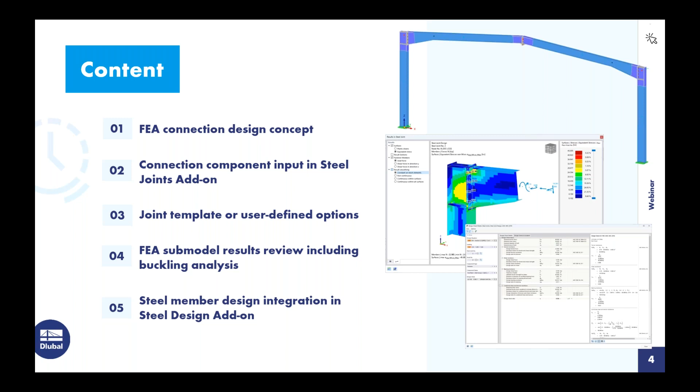So we might be wondering, why would we utilize FEA for steel connection design? Obviously the biggest benefit is going to be the design of non-standard or unique connections. Most likely you have a solution for very basic or standard connections. A lot of software offers this, or even hand calculations. But when we look at this connection over here on the right-hand side with a lot of different components going on, it becomes a little bit more difficult.

So this new steel joints add-on within RFEM allows us to consider the components and the members both in plane and out of plane in one single FEA model. We also can consider complex loading. So if we are modeling the entire steel structure within RFEM, we can apply any of the member loads or unique loading scenarios to the structure itself. The member internal forces at the member ends at the joint will simply be used for the connection design.

So no need to integrate those member end forces into an external program. Again, everything is done within this single file. The submodel is automatically generated underneath the hood of RFEM. So this really doesn't require an expertise level knowing how to create these FEA models. They are rather complex, but rather if you just have a general FEA knowledge, you can go ahead and utilize this capability within the program.

We also will perform the AISC design checks of these connections for our bolts, our welds, and our plates, but we will take it a step further to create a second submodel to carry out the buckling analysis. So we'll be able to view the different eigenmodes and failure buckling modes of this connection, as well as the critical load factors. We'll see that a little bit further in the example today.

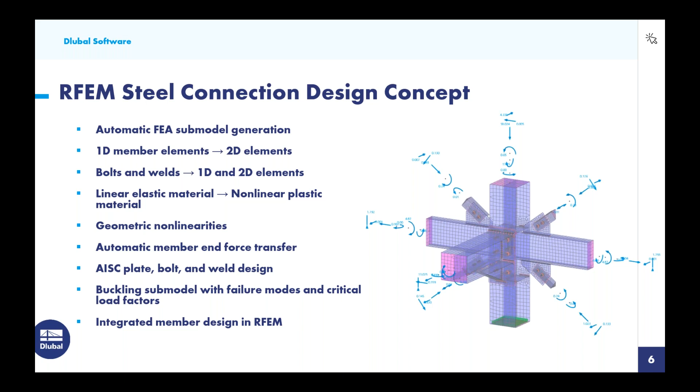Of course, we can get the connection design, but also the ability to design the members themselves, and not just steel, but any material we offer. You could combine this connection design with concrete, aluminum, cold form steel, even fabric tensile structures—all the steel connection design within that same file.

We will begin then in RFEM with our initial example. When we create a new model, we give it a model name. The type of model here is going to be in a 3D environment, so although we just have a simplified 2D frame here, we still are accounting for all forces in and out of plane.

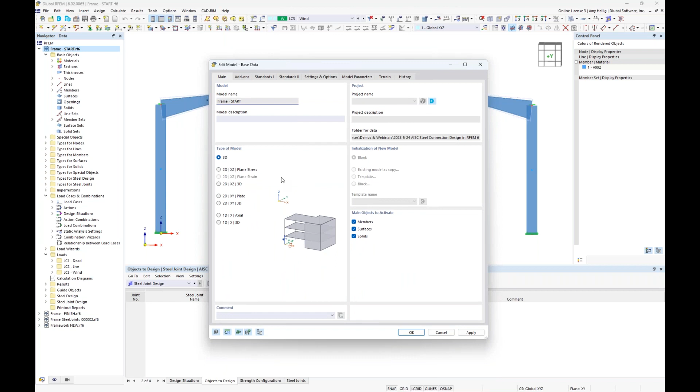Under the second tab, for those not familiar with our program, RFEM is the base program. This is where we can fully model, load a structure, and get the full static analysis. But if we want to do a more advanced analysis like dynamics, or design according to various standards, we need to activate these optional add-ons, which you would purchase specific for your project design.

For today, we'll be activating the steel design, which carries out the steel member design according to AISC, and of course the steel joints for our connection design. Under the third tab, we will generate the load combinations automatically according to ASCE 7.

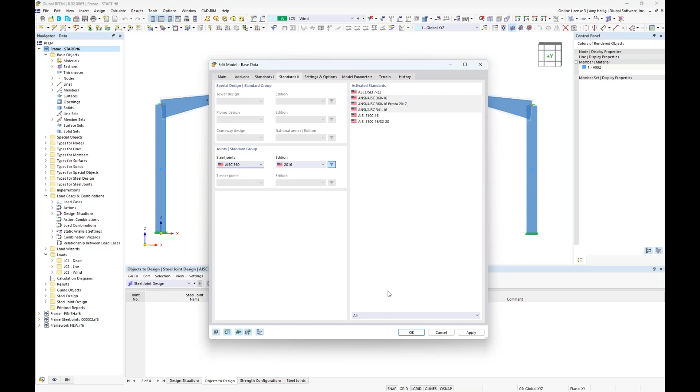We have added the 2022 standard, so that's available here. The steel member design will be carried out according to AISC 360-2016. Under our fourth tab, Standards 2, the steel connection design will also be carried out according to AISC 360.

Once all of this information is input into our base data—as you can see here, for the sake of time, I've already modeled this simple 2D frame—let us just quickly go over some of the information already shown.

If we turn this into wireframe view, these members, as I mentioned, are just standard one-dimensional elements. This is pretty usual for any FEA program—when we model columns, beams, or braces, they're represented by this single line only. But if we turn this into rendered view, we get a better understanding of what this line represents.

We also have the materials assigned to these members, and currently these are all A992 linear elastic materials. We also have our cross sections.

You can see here the columns are assigned as W14 by 48. And for my beam members, these are W12 by 35s. But I also have applied a small taper at the beam member start.

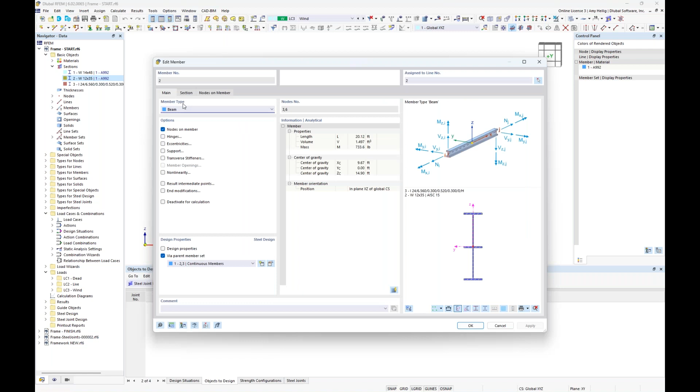So if we double click on this member to go into the beam dialog box, under the second tab here, section, we do have the ability to set a taper at the member start or the member end, and other multiple options here. So I'm currently applying this taper at the first 25% of the member length.

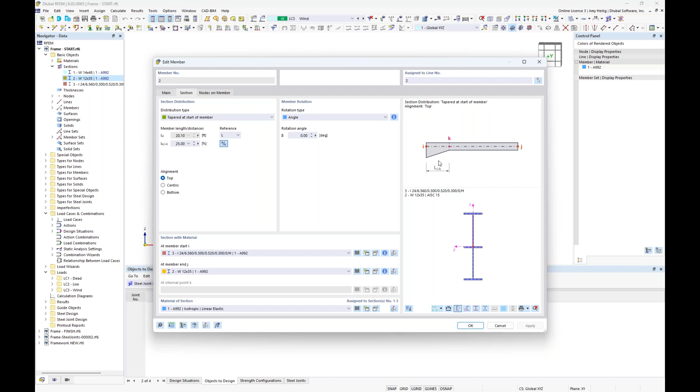And we also can align the taper to the top of the member, for example, and this picture over here will update accordingly. So as mentioned, the beams are primarily W12 by 35, but where this taper occurs at the member start, I took that W12 by 35 and created it as a user-defined section to simply increase the depth. So now we'll linearly transition in the first 25% of this beam member back to the W12 by 35.

So that's a little bit about what's going on with our members. Turning this back into wireframe view to quickly explain our support conditions, we have a fully fixed support down here at the bottom, which was applied by utilizing the assign nodal support up here in my toolbar.

And also because we are working in a 3D environment, I went ahead and put some additional spring supports up here only in the lateral global Y direction. So we'll account for maybe additional members framing in to give that lateral stability at the top of our frame.

And finally, we want to cover the loading. So we have 3 simple load cases for today, and we can see these within our drop-down box up here at the top. If I turn on my loads, my dead load is 0.5 kips per foot, applied as a member load.

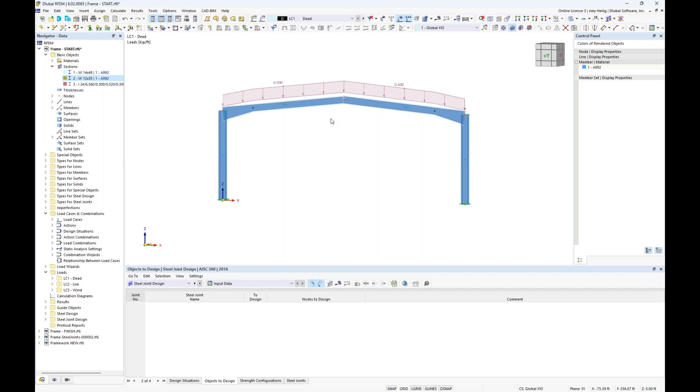When we look at our live load, same concept here, just with a reduced magnitude of 0.3 kips per foot. And then a very simple lateral load here for our wind load case with 0.3 kips per foot at the front side and 0.15 kips per foot at the rear side.

Going into our load cases and combinations dialog box, we will once again see here under our load cases our 3 simple load cases for today: dead, live, and wind. Category was set accordingly to the ASCE 7.

And we can click on this little info button here to see the code references to those load combinations directly. Now notice that these are used within these optional add-ons that we turned on, so steel design and our steel joint or connection design.

I will be utilizing these design situations. I'm carrying out my design according to LRFD for today. Now we also have this second design situation, which is just simply grouping together our unfactored load combinations.

I'm going to use this for my serviceability checks for my steel member design, but we really don't need it for our connection design because serviceability is not something that we're going to check.

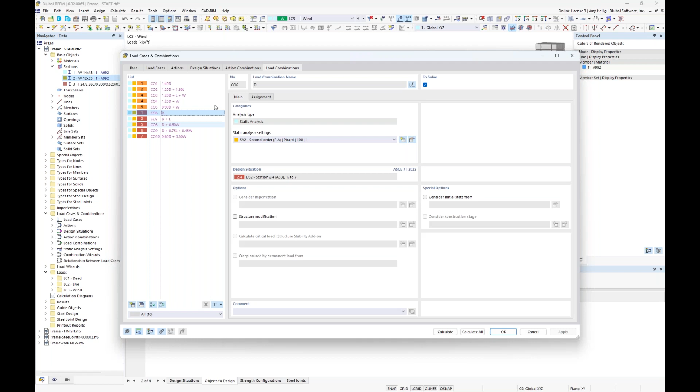So just keep these design situations in mind. We'll come back to them a little bit later on.

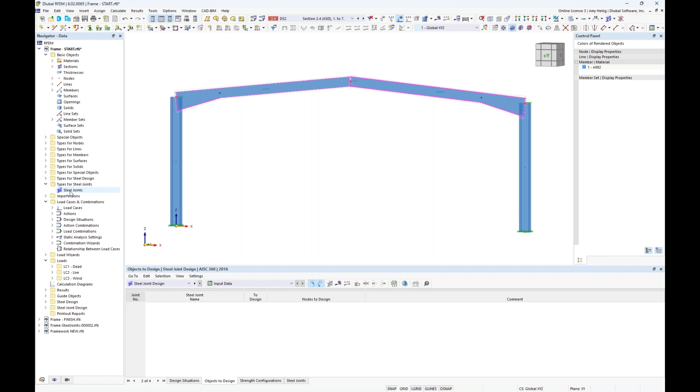So now that we have fully reviewed this model, let us begin by defining our first connection. So because I have activated the steel joints add-on under my base data, we now have a folder option over here on the left called types for steel joints. Well, currently this is empty, but I can right click to create a new steel joint.

And initially, I want to select the node that I would like to apply my first connection. So we can graphically select node number 6, or I could directly input the number here into this dialog box. Both of my members were automatically brought in.

Looking at this second tab, remember that we are going to extract out this submodel for our connection design and run it completely separate from our steel frame that's happening here in RFEM. Because of this, we need to fully support one of these members in that submodel, so we'll go ahead and utilize the support for the beam over on the left.

Now the type is set to ended. This only means that if all of these members simply end at this connection, then the type would be set to ended. Now in another scenario where we maybe had a continuous column passing up through here, but it was modeled as two separate members back in RFEM, then we would have an additional type option available to us.

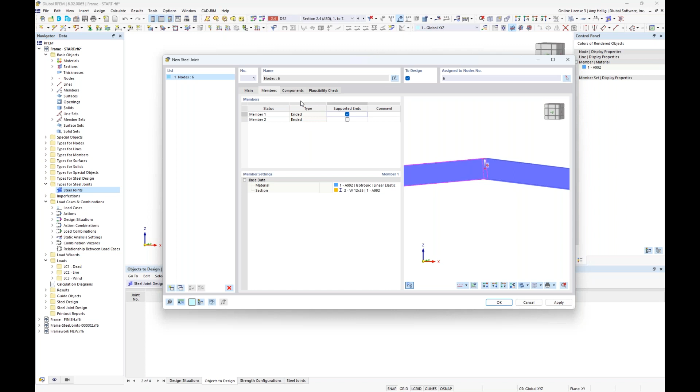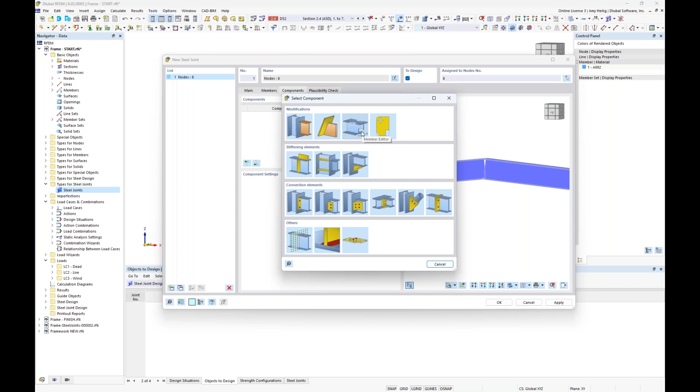We could certainly individually do this with our connection database, our component database. We see each one of these components that we can individually input, such as end plates, or we can input in fin plates, cleats, maybe plate-to-plate connections for beam splices. We also have stiffeners and haunches, and then some additional modifications that relate more to the geometry, so we can make member cuts, or add in openings or notches into our beam elements.

But rather than inputting in these individual components, we could also take advantage of our library options. Within these joint template library options, we have 4 general categories, including rigid connections, pin connections, truss connections, and brace connections.

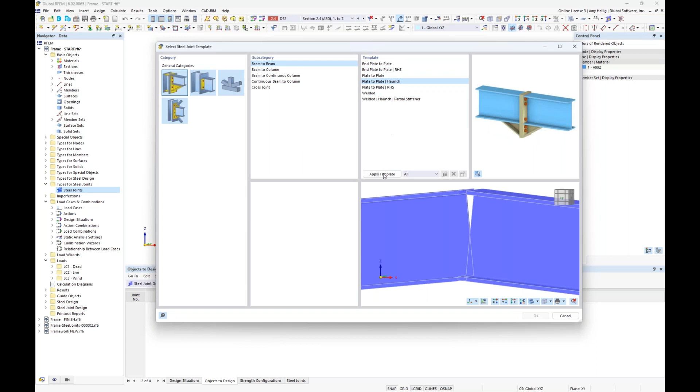So beginning here with the rigid connections, we have additional subcategories such as beam to column, and so on. Within these subcategories, we have additional template options. Looking at the beam to beam, we have an end plate to plate, we have an end plate to plate with a rectangular hollow section. For today, we're going to utilize this option, plate to plate with a haunch.

So when I click apply template here, it's automatically going to apply these components from this library to my specific members here within my RFEM model. So I can click OK, and now we see these individual components listed out and applied again to the members within the RFEM model background.

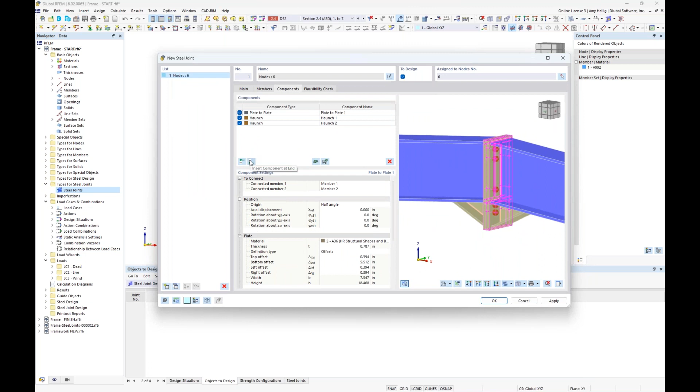Now, we could certainly add on with the individual components here and just use the library as a starting point. We'll certainly need to make some modifications to our geometry, but once you have your connection set and you utilize this connection quite often, it's always recommended to save this under your own user-defined template as well.

So you can see here within this button, we could give the connection a name, set the filter categories and subcategories, and now that connection will always be available for any future RFEM model. That could certainly be helpful if you don't want to redefine the geometry changes or components every time.

So starting off with the first component, you can see here it is plate to plate. We are connecting both members 1 and 2. We can make modifications to the position, but we'll go ahead and leave all of this as default. Now we do need to define the material of these plates.

I already have A36 defined within my RFEM model, but if you did not, you could just access our material dialog box with these 3 buttons here. Within the material dialog box, we can further activate the material library. Over on the left, utilizing our filters to steel, to the AISC 360, then we could go ahead and choose whichever relevant steel material we'd like for this particular component.

Again, utilizing the A36 that's already been defined, I will modify here the thickness of my plate. So we can go ahead and change each plate to 0.5 inches thick for a total thickness of 1 inch.

And now we need to define the plate offset. The offset just means what is the distance from the top of the plate to the top of the flange, and then the bottom of the flange to the bottom of the plate, as well as left and right. So starting off with the top offset, I'm going to modify this to actually a negative 0.375 value. I'm going to drop this plate down below the top flanges here on my beam in the event that we have some type of sheathing material that we don't want it to interfere here with these plates.

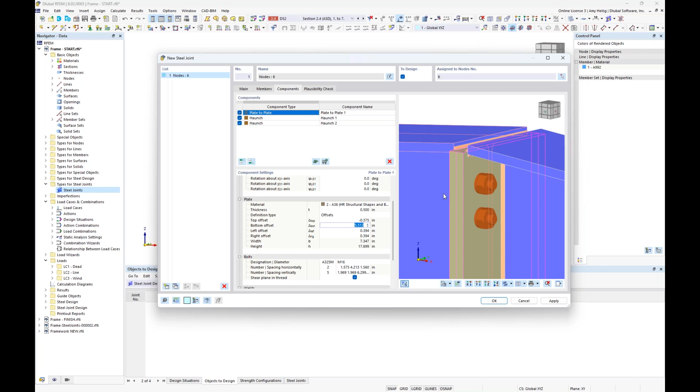Now, as far as my bottom offset, we'll modify this to around 5 inches. Then we have the offset on the left and right, which I'll set at 0.5 inches for the left, hit enter, and 0.5 inches on the right. The dimensions of the plate will automatically update here.

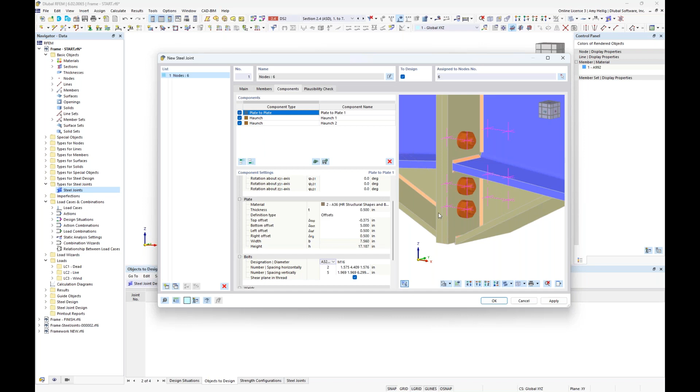Next up is our bolts. We have the designation of the bolts within our dropdown. We'll select A325, and in the dropdown box next to this, we can select the diameter. We'll choose 3/4 inch diameter for our bolt layout today.

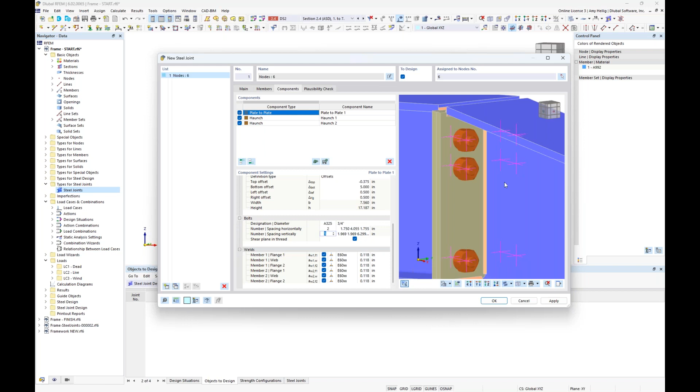Then we have the number of bolts in the horizontal direction as well as the spacing. Currently we have 2 bolts in the horizontal direction, one on the left and one on the right, so we'll stick with a total of 2 bolts. The input in our second column is the horizontal spacing. The first spacing we want to input is the distance from the edge of the plate to the center of the first bolt, so I can input 1.75 inches and hit space. The next distance is from that bolt to the bolt on the other side, which is 4.055. If I hit enter, the program is intelligent enough to set that additional dimension from the center of the bolt to the edge of the plate. Keep in mind the program will attempt to center these horizontally, so you may not need to make changes, but if we want to adjust that spacing, this is how we would do so.

As far as the bolts in the vertical direction, currently we have 5 bolts, but I'd like to reduce this to 3 instead. Once we update this, we need to adjust our spacing. The first input is from the top of plate to the center of the first bolt, which will be 3.5 inches, then I hit space. The next spacing is from this first bolt to the second bolt, 5.5 inches. I hit space again, and lastly define the spacing between bolt number 2 and bolt number 3 as 5 inches, then hit enter. The program will populate the last spacing from our bolt down to the bottom of the plate.

Now, is the thread located in the shear plane for our bolts? If so, we leave this option turned on. If not, we would uncheck it.

Finally, we move on to the welds. These welds are labeled within this first column, and as I scroll through them, they're also highlighted graphically. If I didn't want to apply one of these welds, I could simply uncheck it, and that weld would be taken away from this particular connection. Leaving all the welds active, you'll notice the default weld type is a double fillet weld on both sides, but we can easily modify this to a fillet weld at the front or rear side, or even a butt weld. We'll leave all these as double fillet welds.

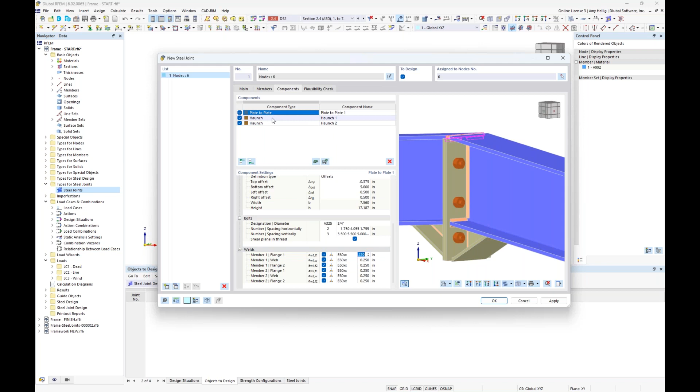That sums up our first component and any of those geometry changes. We now want to move on to our second component, which is a haunch. We see it's highlighted on the left-hand side, and we're currently referencing member number 1 and the particular web.

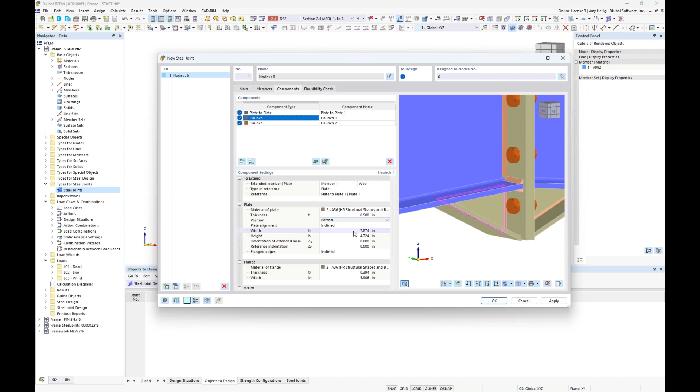We want this haunch extended to our plate shown here. The material is set to A36. We do want to modify the thickness to maybe 0.5 inches. We can also modify the width and the height. I'll modify the width here to 12 inches, and we should see that graphically display here. The height is going to be 5 inches. You'll also see that the program automatically included a flange here as part of my haunch.

If I wanted to get rid of that flange, I could go ahead and use my drop-down box here to select the no option, and that flange should disappear.

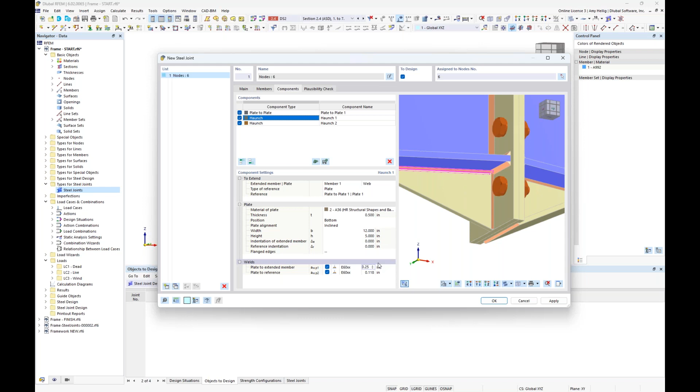Now, finally, we have our weld input for the haunch itself, and we have two welds, which we'll go ahead and again leave as a default double fillet weld on either side. Our first weld is on the underside from the plate to the bottom flange, where we will modify the throat thickness to 0.25. Our second weld is going to be from the haunch to this end plate here, which again we will modify that throat thickness to 0.25 as well. So looking at our haunch on the right-hand side, again, we're complete with this second component.

We move over here on the right-hand side, and we want to make those exact same changes that we just did to the left-hand side. We'll modify the thickness to 0.5 inches. We want to modify the width to 12 and the height to 5 inches. We will also want to select no flange here in our drop-down. And finally, we will modify the throat thickness to 0.25 for both of those input options.

So realistically, this connection is now complete. And again, if you utilize this connection quite often, save it to your user-defined library so you can pull it open with these modifications already set.

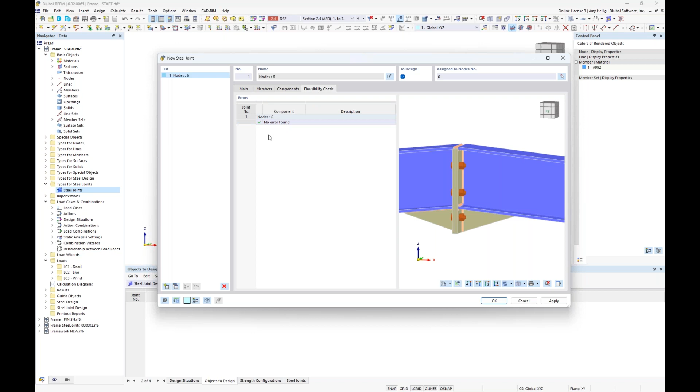The final thing to do with any connection is to check out this fourth tab, the plausibility check. We see here it's a green checkbox with no errors found. If we had any issues, such as bolts overlapping welds or plate elements, or a weld extending beyond a plate, these would all be flagged here so that we could take care of those errors before we move forward with the calculation.

So now that this connection is complete, we can click OK here. What we should see is that graphically, we're going to represent this connection here within the main RFEM model.

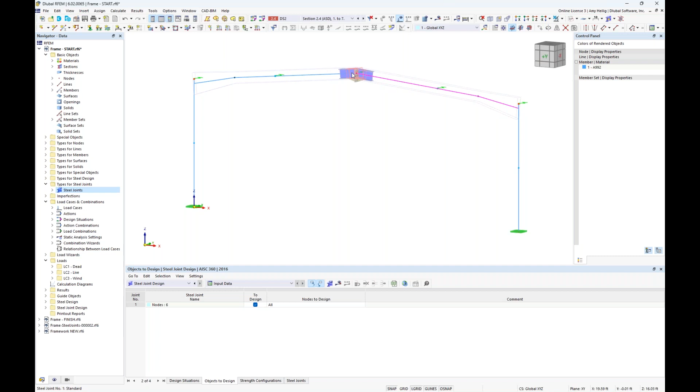Now, to explain a little bit further about what's going on, you'll notice that when I turn this to wireframe view, we still have those one-dimensional members. Notice that these members are still framing from node to node. We're not going to cut off this one-dimensional member where this connection starts. Really, this is just a graphical display of that model that will be acted out and completely calculated separately from this RFEM model. But it is nice to view in a little bit more detail exactly what's going on.

Also keep in mind, a common question is that the member end forces for this beam will actually be taken at this node. They are not taken at this distance away where the connection will begin.

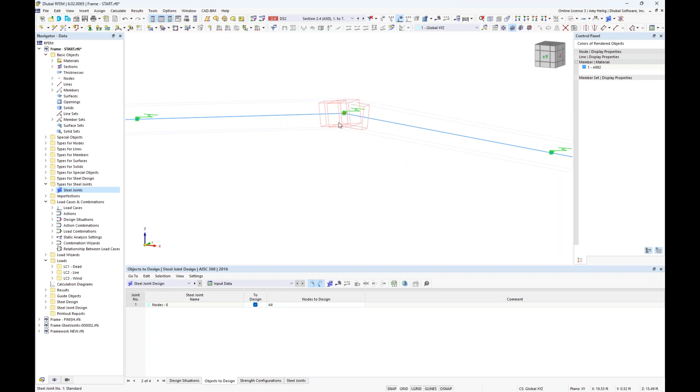Going back then into the rendered view, we can see this connection here with all of the available components, the geometry changes that we just input. Now, with the display of our connection, we also have an additional option up here in our toolbar where we can completely hide that joint model with this dropdown if we're not interested in seeing it. We also have this simplified joint model, which is just represented by some box type symbols here. And finally, we have the detailed joint model, which is currently default and turned on.

So now that we have defined this first connection, we would like to move on to our second connection, which is going to be the tapered beam to the column. So we can again right-click over here in the types for steel joints to create a new steel joint definition, and we want to graphically select here node number 3.

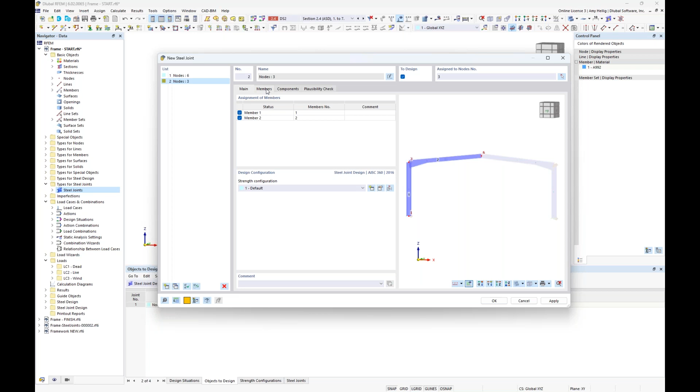I click OK. The two members are automatically imported in here, and under the second tab, if you remember, because we're creating that FEA submodel, at least one of these members needs to be fully supported. So we'll go ahead and leave the column as fully supported. Under the components, we will take advantage of our library option here.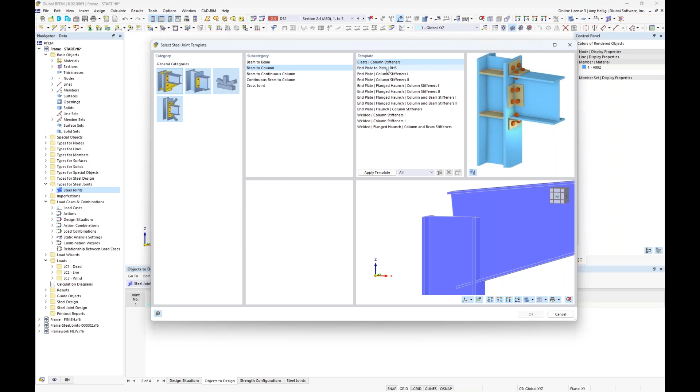This time under our rigid connection, we want to modify this to a beam to a column. Within the additional template options, there are many different options, including cleats or an end plate. For today, we want to utilize the column with stiffeners.

I'm going to hit apply, and yet again, we should see these individual components applied directly to my model. I think we could all look at this connection and agree that this certainly does not look correct.

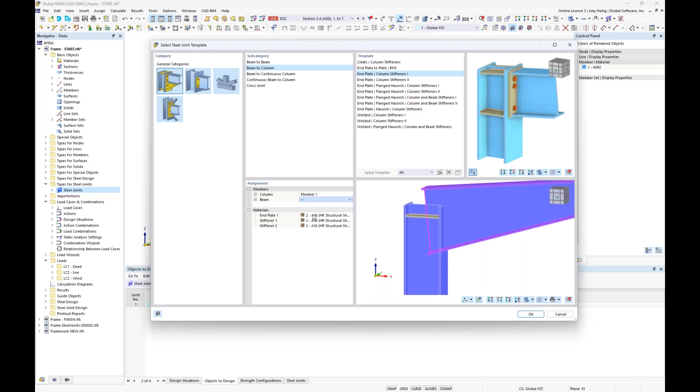This is really just an issue of the program not knowing which member is the beam versus which member is the column, controlled by our options on the left. So in the dropdown for our column, we want to change this to member number 1, and for our beam element, we specify member number 2. Now this connection should look quite a bit better.

So we click OK. Just like with our previous joint, we will now see all of those components individually listed out here. Let's begin with the end plate.

With the end plate, we are taking member number 2, which is that tapered member, and connecting it to the reference member number 1. Steel A36 will be utilized for the material. If we want to modify the thickness, we can input this as 0.75.

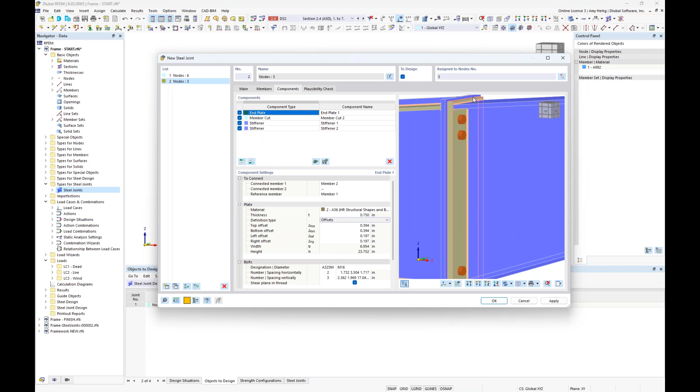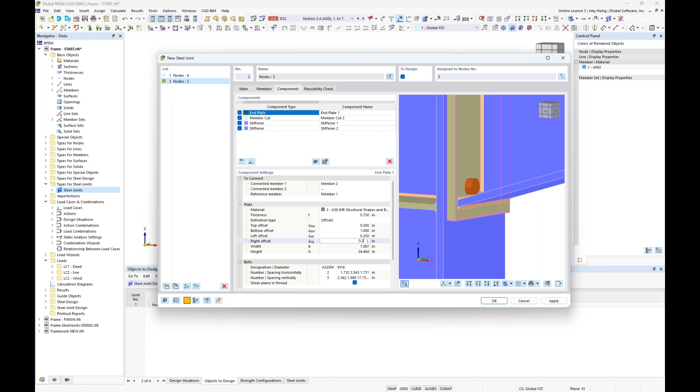Very similar to our last plate element, we want to define the offsets. Looking at our top offset, remember it's the top of the flange to the top of the plate, we'll modify this to 0.5 inches. The offset at the bottom we'll modify to 1 inch. Then we have an offset on the left and right-hand side of those flanges, and we'll set this as 0.25 inches on the left and 0.25 inches on the right.

Now looking at our bolts, clearly we need to make some modifications here. We will be selecting A325 from our dropdown. The diameter of the bolt is going to be 7/8 inches. We are going to leave this as 2 bolts on either side, 1 bolt on the left and 1 bolt on the right. The program has centered these, so I'll leave these as default options.

As far as the vertical bolts, currently we have 3 shown, but I want to increase this to 4. Once I input the 4 bolts, we'll make some modifications to our vertical spacing as well. The first input option is from the top of the plate to the center of the first bolt in the vertical direction, which will be 3.5 inches.

I hit space on my keyboard. We now need to define the spacing from bolt number 1 to bolt number 2, which will be 5.5. I'm actually going to apply 5.5 inches to the additional spacing 3 times between all of these bolts. I then hit enter on my keyboard, and we see all of those update graphically here.

We'll leave the shear plane in thread turned on. Finally, we have our welds. We have the weld at the top flange, again leaving the fillet weld on either side as default with E60 strength. We'll modify the throat thickness to 0.25 once again.

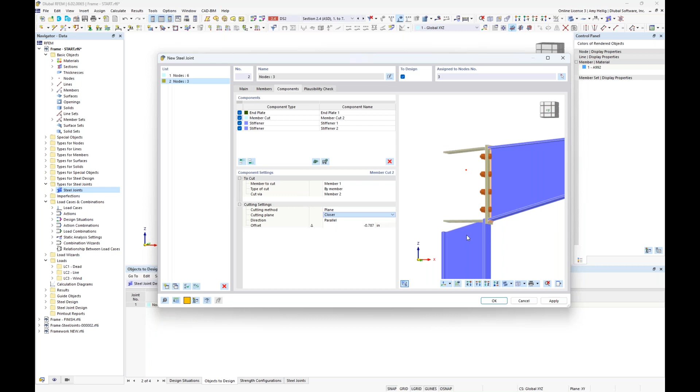When I set this to closer, notice that the column is automatically cut off at the bottom flange. But when I use the option farther, we'll extend that column to the top flange instead. Additionally, the cut of this column is matching the incline or pitch of my tapered member shown back here in this 2-dimensional frame.

If we want this column to be completely straight across, we can use our drop-down options to choose perpendicular instead. Now notice that column is cut straight across, not considering that incline. We'll go ahead and match that pitch by changing this back to parallel, and now that will match the top flange of my tapered beam.

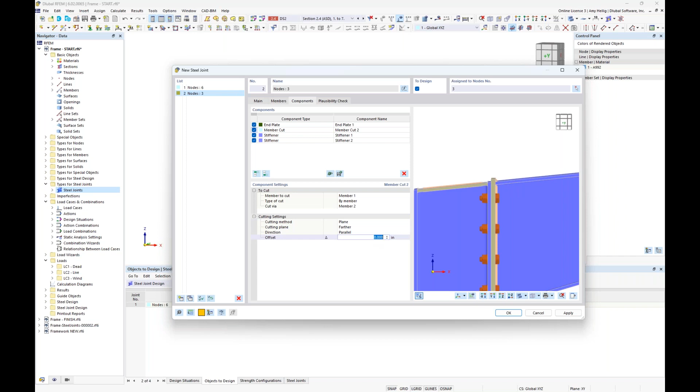We also have the ability to set an offset. If I have this offset set at 0, it simply makes that member cut to match the top flange, or I can set this offset to negative 0.75 inches, which will extend it slightly above the top of this beam. So that's all that is needed for our second component.

We now want to move on to the stiffener. So we see here this stiffener applied, and the stiffened member is referencing member number 1, but we want to apply these stiffeners based on referencing member number 2, the beam. The material is A36 once again.

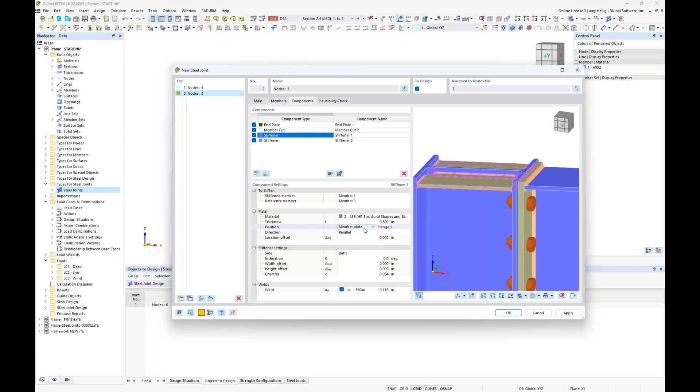Perhaps we want to modify the thickness to 0.5 inches. And we are applying these stiffeners based off the member plate flange number 1 here of our beam, so everything is parallel to that top flange.

Alternatively, if I didn't want it to be parallel, I can make it perpendicular so that we have the stiffener going straight across. Of course, this doesn't make sense here because our column isn't extended up high enough, so we'll go ahead and change this back to parallel.

We could also add in an offset to move the stiffener up or down. And we also have the ability here to set the stiffener on both sides, or within this drop-down option, we could choose just the left or just the right.

And finally, as far as geometry, we have a small chamfer here, so we want to set this dimension to 1 inch exactly.

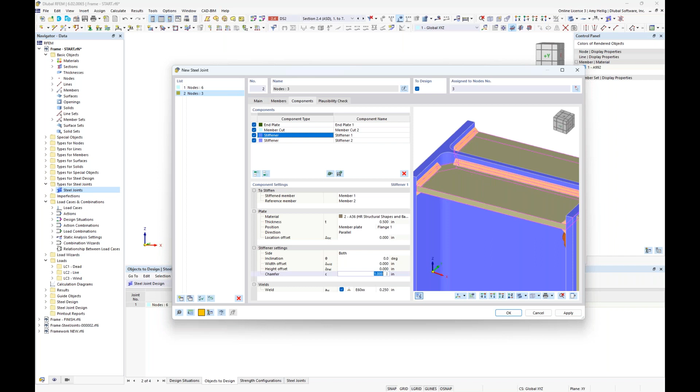Finally, we have the weld. Just like what we saw with our other weld input for our additional components, we're going to leave this as a double fillet weld, E60, with a throat thickness of 0.25. This is just connecting that stiffener back to the column.

Now we also have our last component here for our stiffener shown here at the bottom flange. Again, if I didn't want to account for it, I could just completely turn it off. Or if I wanted to delete it altogether, I can use this red checkbox.

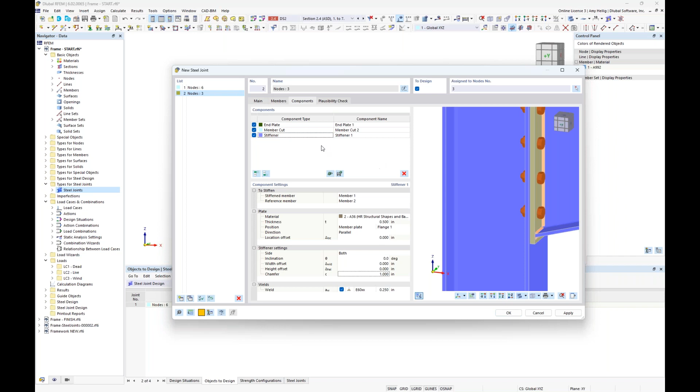I just make sure that I'm selected here under that particular component, and I delete it altogether. The reason why I wanted to show you is that we have a nice feature for existing components: if we right click, we can copy the component to the end of this list. This is a huge advantage if we have made a lot of modifications to our component and don't want to input all that information again, we just simply make a copy.

Now, currently the second stiffener is sitting right on top of the first stiffener, so that's not ideal. But what we can do is simply move it by referencing, instead of flange number 1, flange number 2, which is highlighted here as I select it within my dropdown. Currently it's set to parallel, so it matches the angle here of that taper.

But if we wanted to modify this to perpendicular, we can do so. Now we see that stiffener shown at the bottom in the perpendicular position. And if we wanted to modify the thickness to something smaller, we could do so here at 0.375. So now this fourth component is now complete.

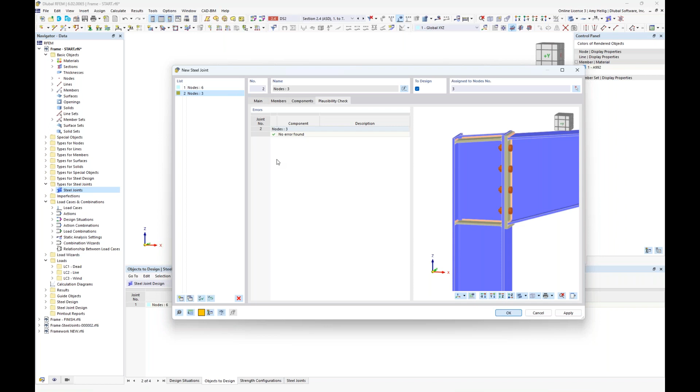Again, checking the plausibility, no errors found. That's great. If we had any issues with geometry or anything else, the program would notify us here. So when I click OK, we should now see this connection applied over here to the left-hand side.

What you will notice is that we actually want to apply this exact same connection here on the left-hand side to the right-hand side. Rather than redefining all of those additional components and a new steel joint, the program's intelligent enough that I can go back to node number 3 here, my connection that I just defined, and in addition, select node number 11.

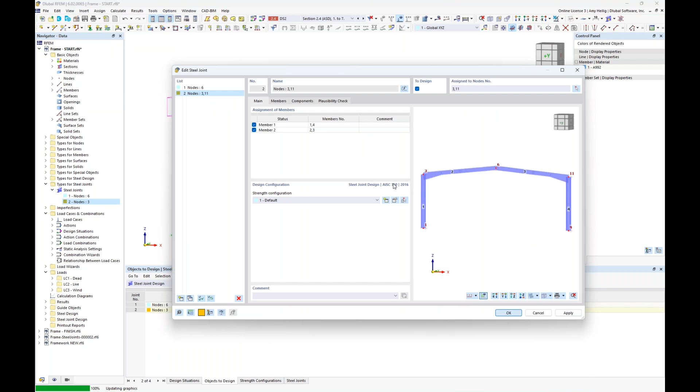And I click OK. So we have an identical layout for our joint template here. It's just the mirror image of the other side. If you have the exact same connection details but it's just slightly oriented differently within the model, you could certainly apply multiple nodes to the same joint definition.

All right, so we are almost ready to move forward here with our analysis and design. But one thing I wanted to cover before we do, if we go back into the steel joints and edit the dialog box, this brings us back into the dialog box we've previously been in, but you'll notice there are design configurations, and there's one option here for strength configuration with a default setting already specified.

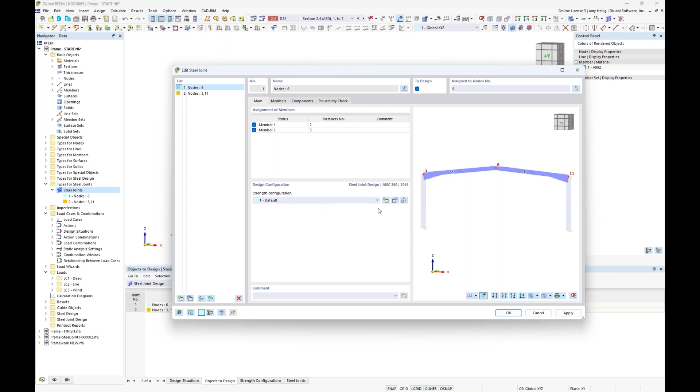The strength configuration, if we go into edit this, is specific to the AISC design of our connection, but also that submodel that's going to be generated underneath the hood. We have to assign a configuration to each one of these joints, and you can also create different configuration settings for different joints.

Taking a look at the default option shown here, you'll notice the first option for my connection design is to also perform a buckling analysis. So we can go ahead and turn this on. Now, I do want to let you know that you have to own the stability analysis add-on in order to carry out the buckling analysis in addition to the actual AISC connection design. So if you want to take it that step further, you need to own the stability analysis add-on.

You don't need to go back to the base data and activate it. Everything is controlled here through this dialog box. We now get an additional tab here for buckling, so in addition to that FEA submodel, we'll carry out an additional submodel for the eigenvalue analysis.

You can see the analysis type is set to a linear analysis, but we also have nonlinear options here. Just keep in mind that calculation will take a little bit longer if you apply a nonlinear analysis. We will calculate by default 4 eigenvalues, but you can increase or decrease this depending on how many different failure mode shapes you're interested in.

Second order analysis is considered, and finally we have the limit load factor. This is a user defined input option here, and it relates back to that critical load factor. So when the critical load factor falls below 15.0, the program will flag you that maybe buckling is a consideration you need to look at further for your connection. Again, you have the ability to increase or decrease this factor. It'll make a little more sense once we look at the buckling results.

So let us go back to the PowerPoint to discuss this in a little more detail. By inputting this plastic strain limit, this is going to be used for the strength limit state criteria for all surfaces. And what I mean by surfaces, remember our one-dimensional members for our beams, our columns, these are all converted to 2D surfaces. So our flanges, our webs, our end plates, haunches, all of these are now 2D surfaces.

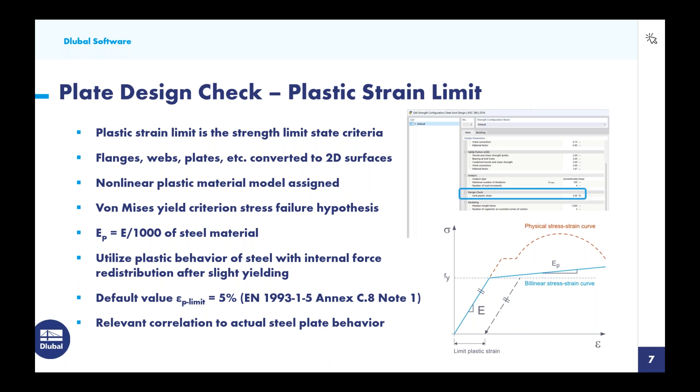Overall, there have been studies done on this that show good relevant correlation to the actual steel plate behavior by limiting the plastic strain instead of the stress. So that's what's going on here within our design configuration for all plate elements. This is the only check that we will carry out, by limiting that plastic strain.

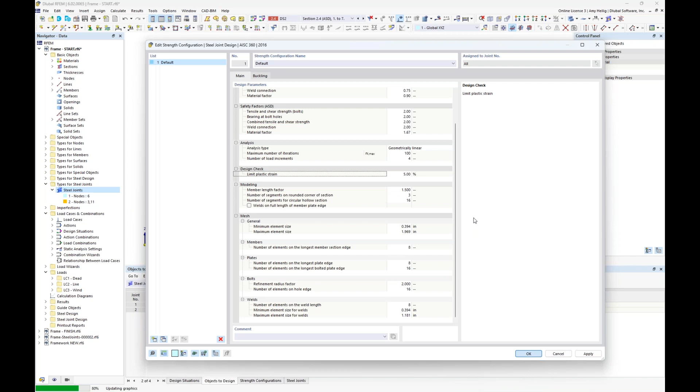So once this information is all input into our configurations, the final thing to do is to go back here to our RFEM model and jump down to the steel joint design add-on.

Within this add-on in table format, we have our two design situations, which we covered earlier. We have our LRFD design situation where we want to set this to the strength limit state for LRFD design. Now, alternatively, if I was carrying out ASD design, it might look similar to this, where I use my drop down to carry out my second design situation for my unfactored load combinations according to the strength limit state for ASD design. But I'm carrying out LRFD design today, so we'll go ahead and utilize that first design situation.

The objects to design, we will be designing all three connections here. And in a very similar workflow, we also have the steel member design. I did an entire webinar devoted entirely to steel member design according to the AISC, which goes into much more detail than what we have today. My point today is just the ability to design the members along with the connections.

So we have our two design situations here for our steel member design, and we're going to relate that first design situation, factored load combinations, to the strength limit state for LRFD, and then my unfactored design situation, ASD, is related to serviceability, so those deflection checks. I will be designing all members here as well.

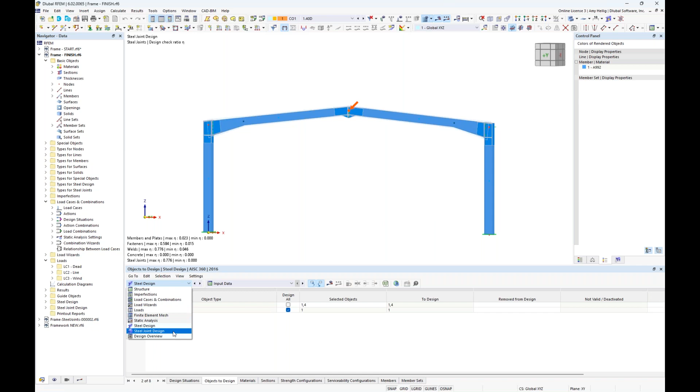Well, what we should see once we run our analysis and design under the steel joints table here is our results. And we can view the stress strain analysis design ratios by node. So now you'll notice here that I have 3 design checks for each connection, and these 3 design checks include the plate check, the bolt check, and the weld check.

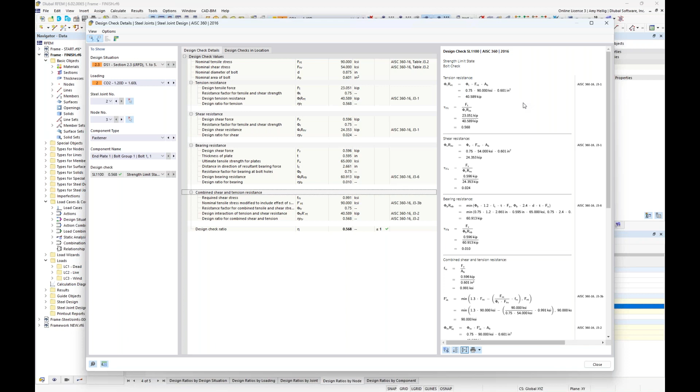Within any one of these specific design checks, such as the bolts here, I can go ahead and activate my design check details. This is true for both the bolts and the welds. We'll take a look, though, only at the bolt elements. I'll go ahead and expand out my options on the left-hand side, use my control key, and zoom in here to these equations so they're a little easier for you to see.

We are checking the bolts for all scenarios carried out by the AISC, including tension resistance, shear resistance, bearing, combined shear and tension, and so on. We then take the max design ratio out of all of these and present it to you as that design ratio. All of the code references are given here, all the formulas line by line, and the variables are listed out. You can add this information to your printout report, so we're trying to be as transparent as possible about where these specific checks come from.

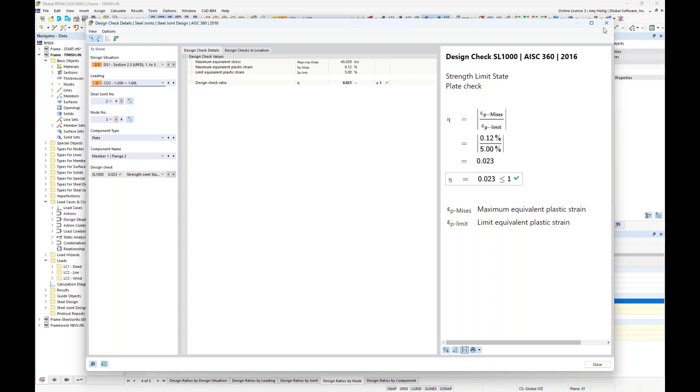Same concept for our welds. If we look at our plate check, this is currently for my connection shown here at the left and the right, which you can see are highlighted. I'll go ahead and open up my design check details here, and you can see this looks quite a bit simpler. This goes back to the PowerPoint slide we just covered, that for all of our plates — flanges, webs, end plates, haunches — we are only going to check this limit plastic strain. So we have the limit plastic strain set at 5%, then our plastic strain from the actual analysis, and we ultimately get a design ratio. So that's a little different here for our plate checks versus the bolts and the welds.

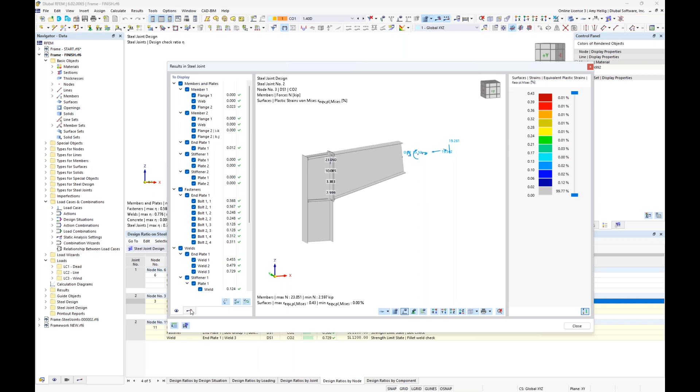In addition to the design check details, we also have the ability called results in steel joint. We can activate this, and it will show us a submodel of this particular connection. We're currently looking at the tapered beam to column connection. If I scroll to my second tab, we are viewing the plastic strains for this connection for load combination number 2. Zooming in, at first it doesn't seem like much is going on, because we gray out the strains that probably aren't of much interest. But we do see some higher strains here at the top of the connection.

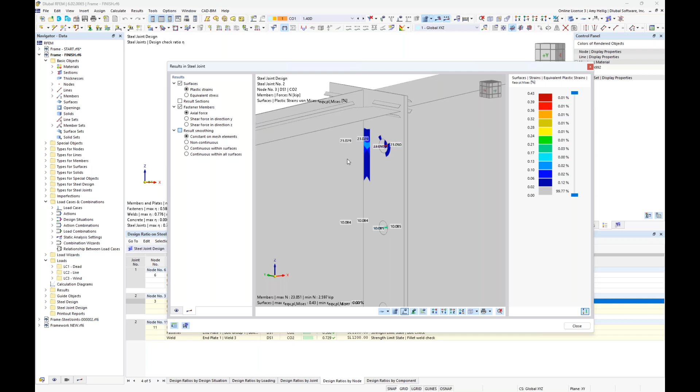Alternatively, we can toggle this to the stresses instead, which might look a little more interesting, as we can actually view the stresses for all of our components graphically. And of course, where we saw those higher strains, we're also going to see those higher stresses given.

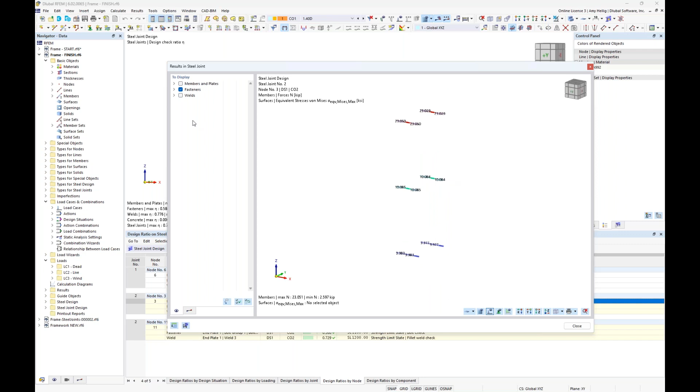Going back to this initial tab, if I collapse these different display options, I have the ability to turn off completely my members and plates and maybe my fasteners, and now view the stresses just on the weld elements themselves. Or if I'd like to turn on the bolts, I can activate the fasteners, and we see the tension forces in kips given to us graphically. Finally, going back to the display of all these options, we return to the stresses shown for all components.

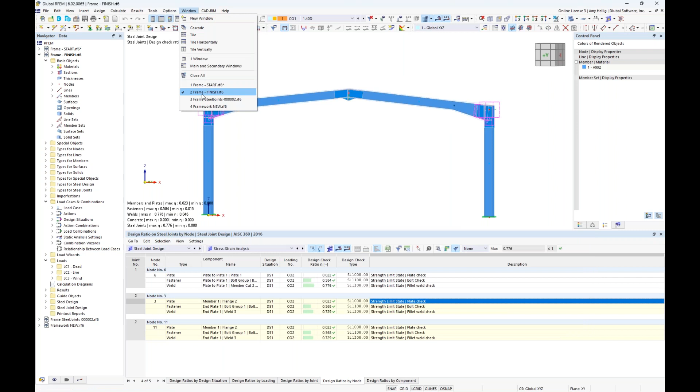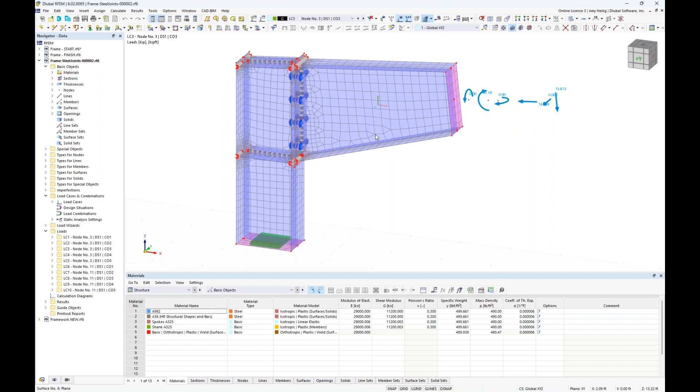In addition to viewing this information, we have the ability to save this model to our computer, and when we save it, we can open it up like any other RFEM model. I went ahead and saved that particular connection to my desktop so we can see what this model actually looks like, all being created automatically underneath the hood. So here is our exact same connection with the FEA model shown in detail. Notice that the web elements, the flanges, everything was converted to these 2D surfaces. And if we turn this into a wireframe view, you'll see everything is meshed automatically for us.

Let me go back to the navigator to turn off the mesh so we can look at the weld elements. These weld elements are a mix of 2D surfaces in order to get the stresses, but we are also transferring forces between the weld and the plate elements with these small rigid links.

We also have our bolt elements. I mentioned some of this in the PowerPoint, but if we double click here, we can actually see that these bolt elements are represented by a standard beam element. The cross section is also taken into consideration, the diameter of our bolt element that we've set, as well as the material.

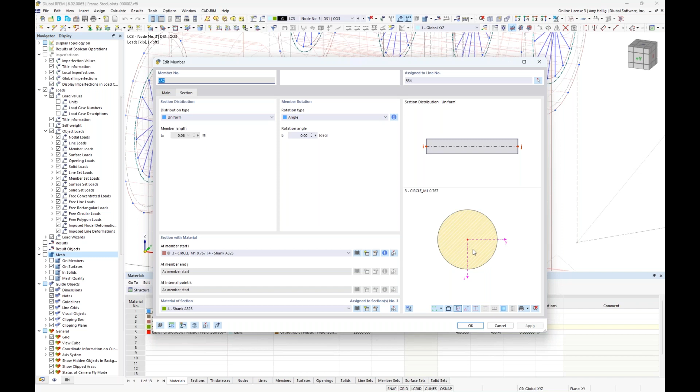We are going to transfer the forces in this opening where the bolt is passing through with what we call spoke members. These spoke members are nothing more than beam elements themselves with a cross section assigned, and everything is optimized with the cross section and the number of spoke members in order to transfer those forces between the plate element to the bolt and vice versa.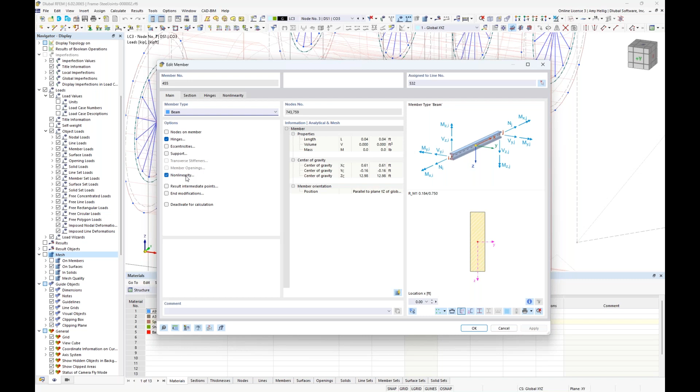We also have a nonlinearity applied here for this beam spoke member so that it will fail in tension. We really want this bolt to bear onto the plate element when it's in compression, but if we have any tension between those two elements, that connection will fully fail.

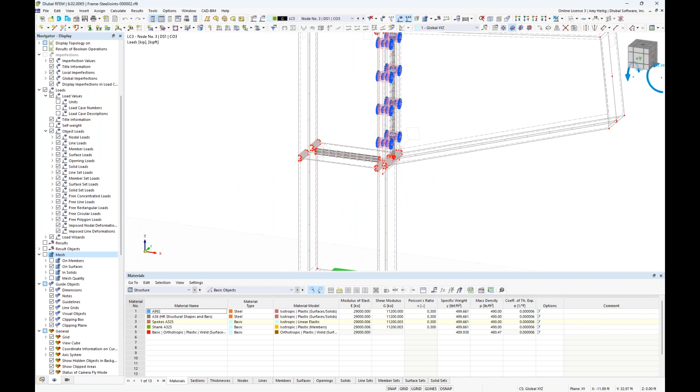So that's what's going on underneath the hood - it's really just putting together all of these different elements into this FEA model. By all means, you have the ability to manually create this same exact connection. We're just taking it a step further by giving you the ability to automatically generate this pretty complex model underneath the hood.

A couple more things to touch on if we take a look at the materials. All of the materials are listed here for our beam elements, and I'll turn this into a rendered view - A992, A36, and even our bolt elements and our welds have the relevant material. But you will see that these are now converted to plastic material models rather than linear elastic.

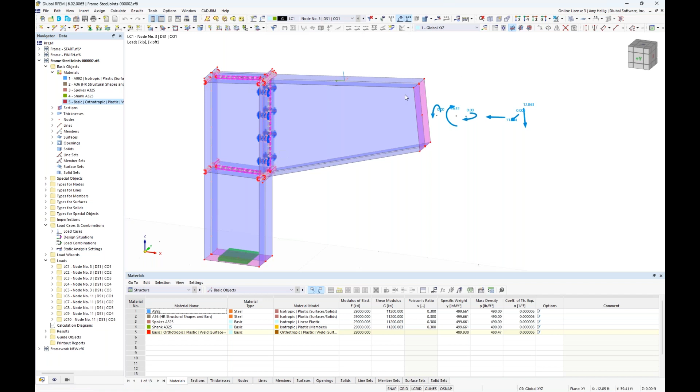Finally, if we take a look at our drop down about all the different loading scenarios, these are our ASCE 7 factored load combinations that are being applied here to the member end. As I scroll through these different load combinations, we should see these loads update automatically. They're applied here to a rigid plate.

This rigid plate allows the load distribution across the entire face, so we don't have to worry about topics like singularities because this load is distributed again to the entire face of these elements. And remember too that we had to set at least one supported member - we can see that support applied here at the bottom of the column.

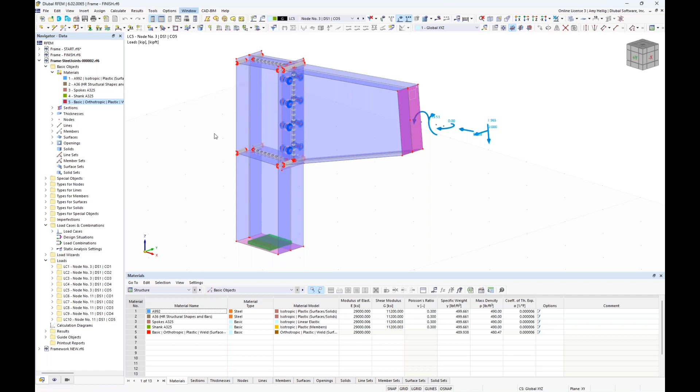Okay, so that will cover just the submodel. Let us go back to our frame quickly to talk about the buckling behavior.

In addition to the design according to the AISC, if we go back to the steel joint design, we have an additional drop down here for the buckling analysis. Looking at the buckling analysis results in table format, we are calculating 4 eigenvalues here for each connection as well as each load combination.

As we scroll through these, it should highlight exactly which connection we're looking at. You'll also see here our critical load factor, and if you remember, under the configurations, we told the program to flag us if this critical load factor falls below 15.0. So what is a critical load factor?

If we're currently looking at our connection here, and load combination number 2, the critical load factor is the value or the factor that you can multiply your loads in load combination 2 before you're going to see some type of buckling behavior.

So when we are getting down around to values such as 1.0, this is a very big problem. Anything less than 1.0, the connection cannot handle 100% of the loads before we're going to see buckling. So again, we can set that user-defined value for when to flag us for that critical load factor.

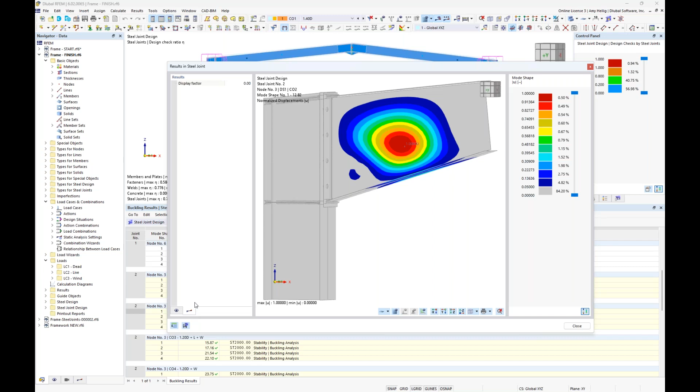What might be interesting too, in addition to the table format, is to launch the results in the steel joint here. It will look similar to what we saw before, but now we're viewing the eigenvalue, or eigenmode, instead of stresses and strains. Under load combination number 2, with a critical load factor of 12.82, we might be concerned with buckling within the web of our tapered member.

If we scroll back up to our center connection and launch the display of the buckling behavior, notice the critical load factor is much higher for load combination number 1, at 31.09. But in this case, we might be more concerned with initial buckling of our flanges, with a secondary concern of these web elements for the center connection.

So buckling is certainly something that is not easily accounted for with hand calculations or analytical calculations for connections. We have the ability here to carry out this additional analysis and determine if buckling is a concern, whether we need to increase the thickness of the web members or flanges, or add additional stiffeners with those component input options.

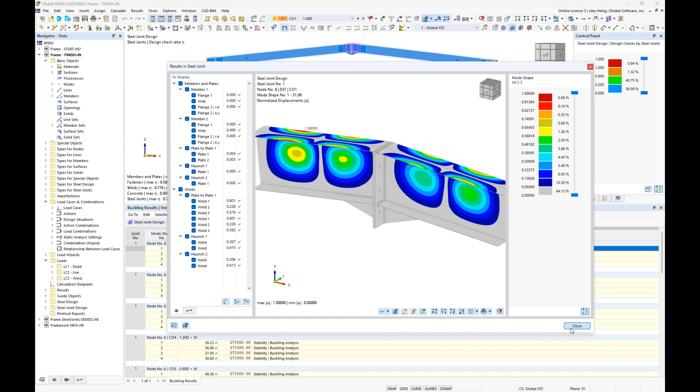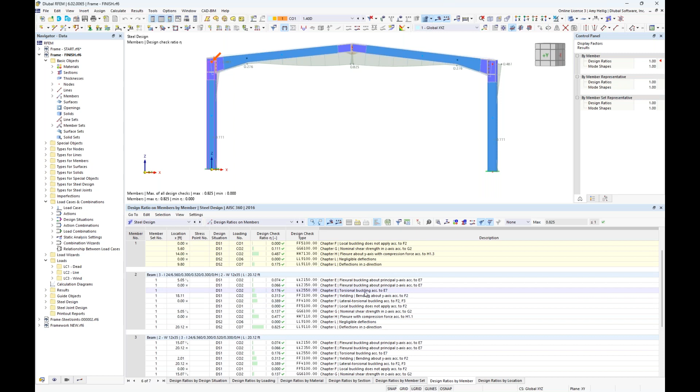That sums up the connection design, but keep in mind we also did the steel member design. We can view the results within our table format here, with design ratios by each member. Just as with any other steel model, we get full design according to the AISC, with calculations carried out according to each relevant chapter.

So the ability to design members and connections is quickly shown with this example. Now, I know this was a very simple application, and we might argue we could easily do hand calculations or use current software for connections like this. But I wanted to open up another RFEM model with a bigger structure, with multiple steel members shown in 3 dimensions.

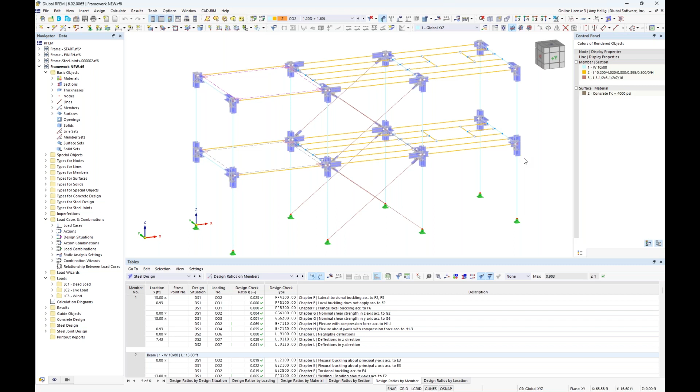I've also modeled a couple of concrete platforms within this structure. If I go to the wireframe view, you'll notice I've defined these joint connections at all the major intersections of our steel members. Let's take a look at one of these connections — I'll create a visibility by this selected object and turn it back into a solid rendered view.

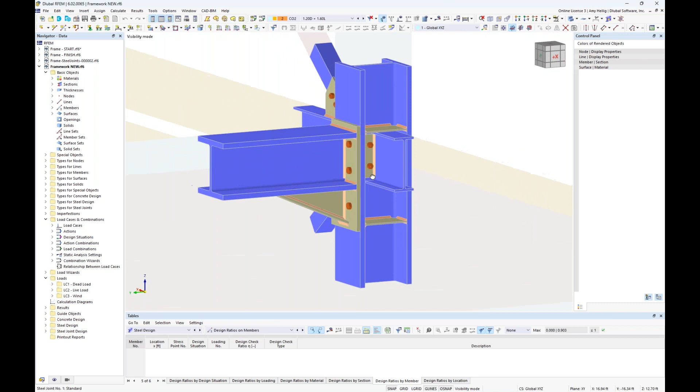When we zoom in, we can see this connection is certainly more complex than what we saw with our 2D frame. We have beams framing into the column in the strong axis, and also beams framing in the weak axis. I've added end plates, haunches, and we have stiffeners shown here. So quite a bit more going on.

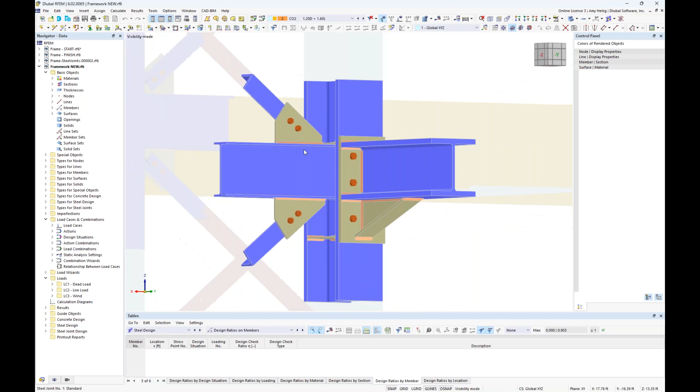If we rotate over here on the right-hand side, we also have tension-only braces framing in, transitioning from these plate elements, and they are welded to the top and bottom flange of my beams. So we can carry out the full connection design here as well.

I'll zoom out and rotate this back around. Under the steel joint design, you can see the design ratios for each of these nodes is carried out. We have 3 design checks here for our plates, our bolts, and our fillet welds — all encompassing an FEA submodel shown for each connection.

We also carried out the steel design — all these steel members have been automatically designed according to the AISC. I even took it one step further to design these concrete platforms, carrying out the ACI design considering the reinforcement applied. We see a couple high reinforcement design ratios shown here, which is no surprise — an issue of shear where these platforms connect back to the steel members. All in all, this is an all-encompassing option within RFEM to do a multi-material design along with the AISC connection design.

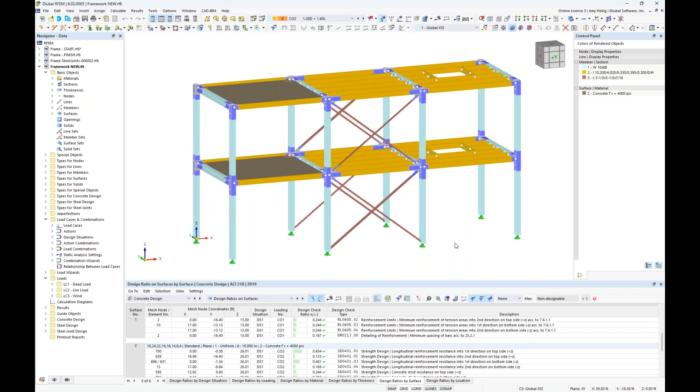Currently we support all AISC cross sections, and you can even input user-defined parametric sections as well. You're not limited to only the AISC sections.

The only exception to this is round HSS. Currently we support square and rectangular HSS. Round HSS is currently in development and should be released very soon. A preloaded bolt input is also not quite ready, but is currently in development for topics like slip critical connections, so that should be available very soon.

We also recognize that AISC 360 2022 was released, so we'll go ahead and add any updates to the standards. You'll have the ability to design according to the 2016 or the 2022 as soon as we implement that.

Additionally, we are planning to add the ability to export the true stiffness of this model back to the main structure. This joint stiffness is already calculated with the FEA submodel, so we know the stiffness of the connection. Therefore, we can export that stiffness for the member design rather than having fully fixed or fully released member end releases. We'll be able to account for the true stiffness there.